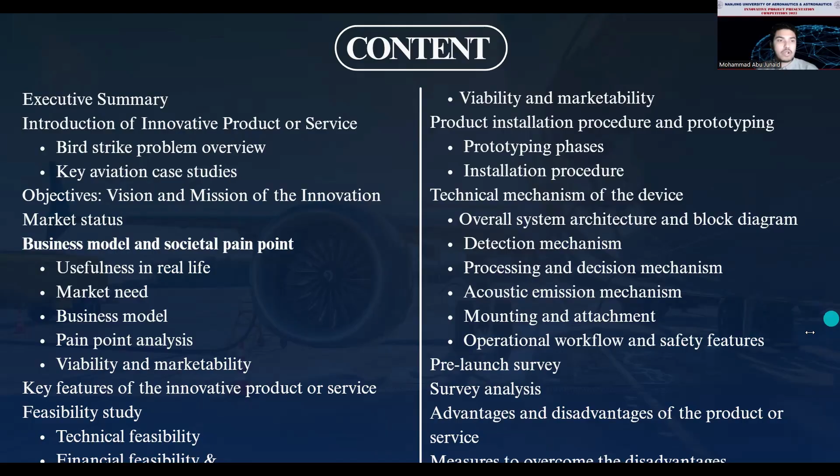Then we have the pre-launch survey analysis, and advantages and disadvantages of the product or service, and measures to overcome the disadvantages—we also discuss this. Moving on, we have the life cycle of the project, how we will design it, and the overall design and architecture—everything discussed in that part. And the project rationale, overall objectives, overall delivery of this project, how long it can take, and the methodologies we used to design this product and everything.

Everything is introduced over there. The project implementation: introduction, how we use the project to system components and interface overview, pre-flight procedures, in-flight operation, post-flight procedures, troubleshooting, and safety notes are all covered in this section.

Then we have the problem and risk assessment plan, how we can do all these things, and unfinished work, future improvements, and everything. After that, we have the acknowledgements, our learning outcomes, our meeting minutes, and every single thing we did in this course as case studies. So we also discuss this matter.

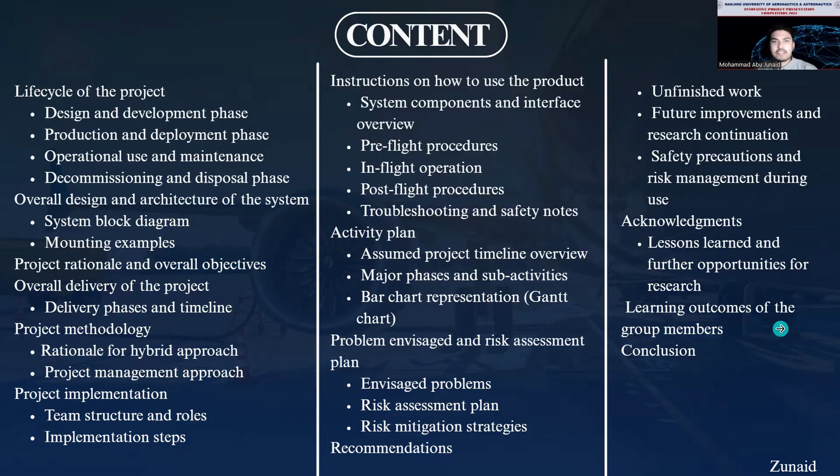So now let's begin with the executive summary. Good afternoon everyone, I'm Zunaid, and I will be walking you through the executive summary, a key case study, and the vision and mission behind our innovative solution to one of aviation's most persistent safety challenges: bird strikes.

The problem: bird strikes are not just a minor nuisance, they are a serious, costly, sometimes deadly threat to aviation safety. In the US alone, there were over 22,000 reported bird strikes in 2024 and 2025. Globally, these incidents cause more than 1.2 billion dollars in damages every year.

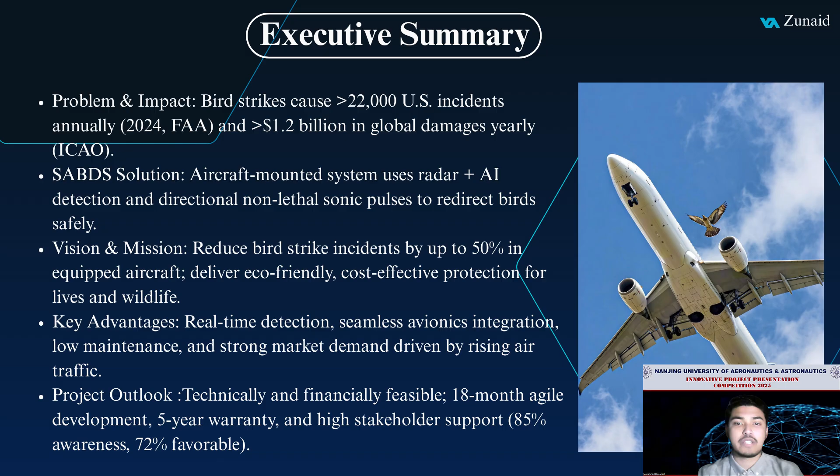But beyond the numbers, there are real human stories, and one of the most famous is the Miracle on the Hudson. Now we move to the case study: Miracle on Hudson.

In 2009, US Airways Flight 1549 struck a flock of Canada geese just after takeoff. Both engines failed. Captain Sullenberger and his crew had to make an emergency landing on the Hudson River. All 155 people on board survived, but the incident exposed a critical gap in aviation safety.

Engines were not designed to withstand large bird flocks. The event became a turning point in how we think about bird strike prevention.

Our solution, the SABDS (Sonic Aviation Bird Deterrence System), could have changed the outcome of that day. Using radar and AI, SABDS detects birds up to 500 meters ahead and emits non-lethal sonic pulses to redirect them away from the aircraft's path.

Moving on to the next slide: our vision and mission. So what we are trying to achieve - our vision: a world where bird strikes are virtually eliminated, safer skies for everyone. Our mission: to deploy a certified, humane, and affordable acoustic protection system for global aviation.

We have set clear strategic objectives to guide us: reduce bird strikes by 40 to 60% during takeoff and landing. Environment: 100% non-lethal, protecting both passengers and bird populations.

Economy: saves over 100,000 dollars per avoided major strike, with ROI within 2 years. Certification: achieve FAA and EASA approval, meeting all aviation safety standards. And market development: target high-risk regions first, aiming to equip 20% of the global commercial fleet within 5 years.

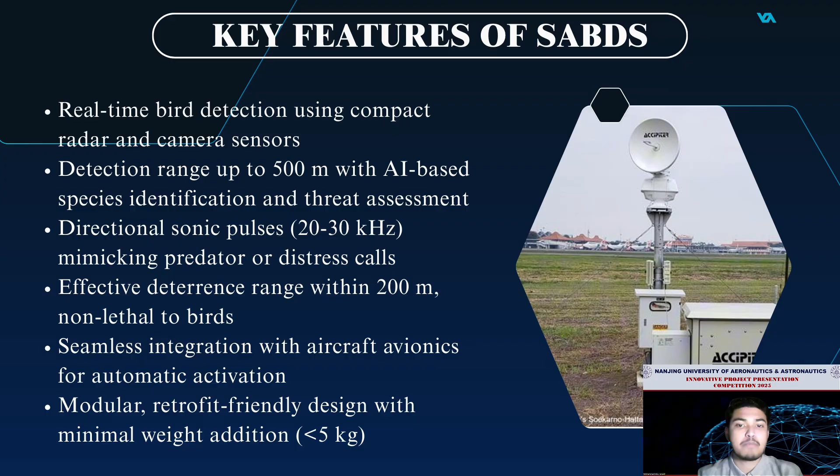I will now hand over to Kaium, who will dive into the market analysis and business models. Thank you. Hello everyone, my name is Abdul Kaium Talukdar, and I'm excited to walk you through an innovative solution designed to make aviation safer for all of us.

SABDS uses compact radar and cameras to detect birds in real time, up to 500 meters away. It can even tell what type of bird it is using AI. Once a threat is confirmed...

...it sends out directional sonic pulses, like predator calls, to safely scare birds away without harming them. And it's lightweight, easy to install, and works automatically with the plane's systems.

But there is more: our system is eco-friendly, uses very little power, and is made from recyclable materials. It logs all bird encounters for later review, and pilots can take manual control if needed. Plus, the sound library can be customized for different regions. Overall, it's designed to keep flights safe without adding extra work for the crew.

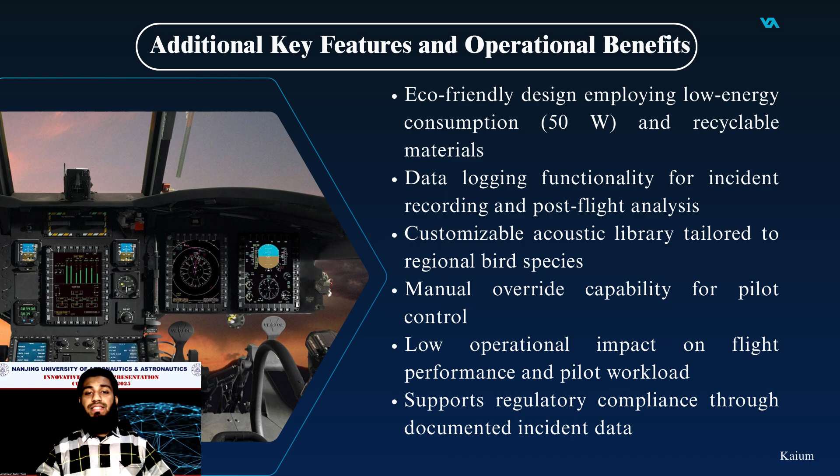So, is this idea realistic? We did a full feasibility study looking at technical, financial, and market angles. We based everything on real bird strike data and cost. The goal was to make sure SABDS is practical, low risk, and fits within aviation safety rules, meeting today's needs and tomorrow's challenges.

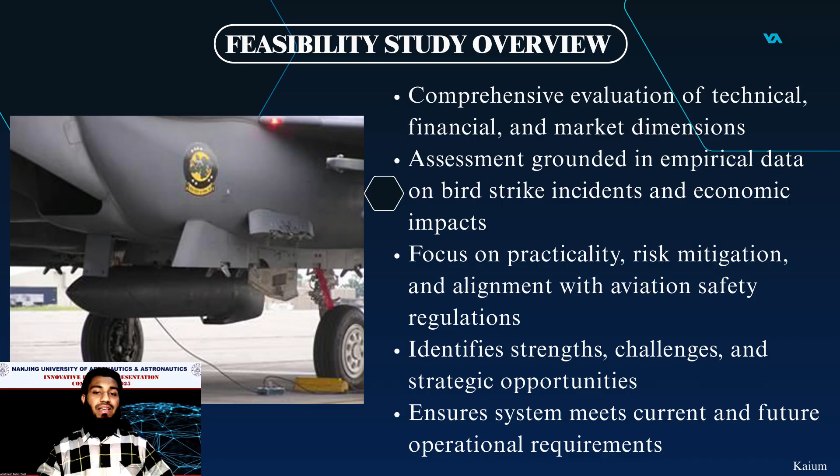Technically, we are on solid ground. We are combining proven tech, bird radar, directional sound, and AI. With over 95% accuracy in threat detection, the system meets FAA standards, runs on low power, and has backup systems in place. Similar acoustic systems are already used in wildlife control, so the concept is tested and ready.

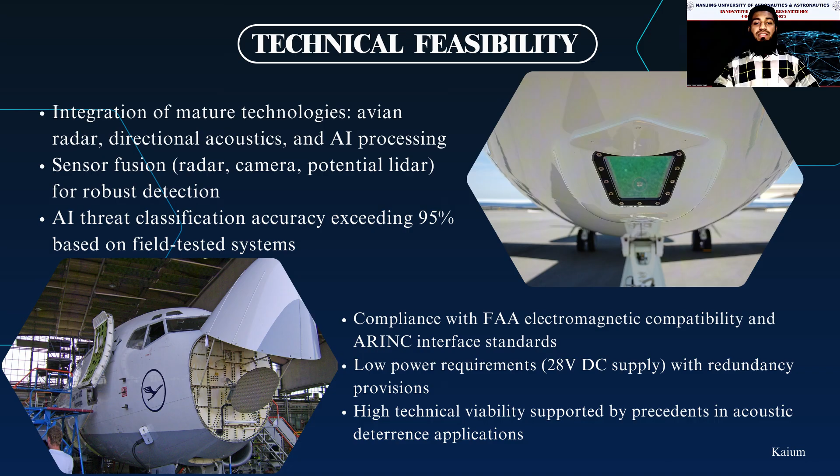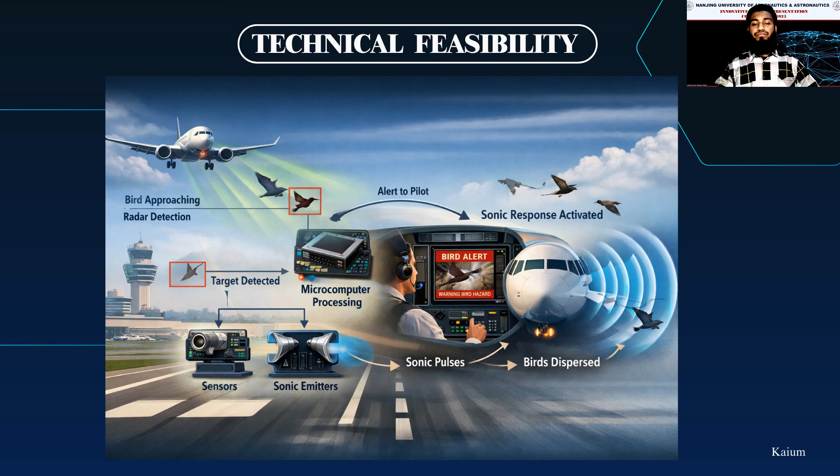Of course, there are challenges. We designed the system to withstand vibration and weather, use shielding to prevent electrical interference, and build smart software to adjust for bad weather. We are also using 3D printing and off-the-shelf parts to speed up prototyping; wind tunnel and sound chamber tests confirm it's durable and reliable.

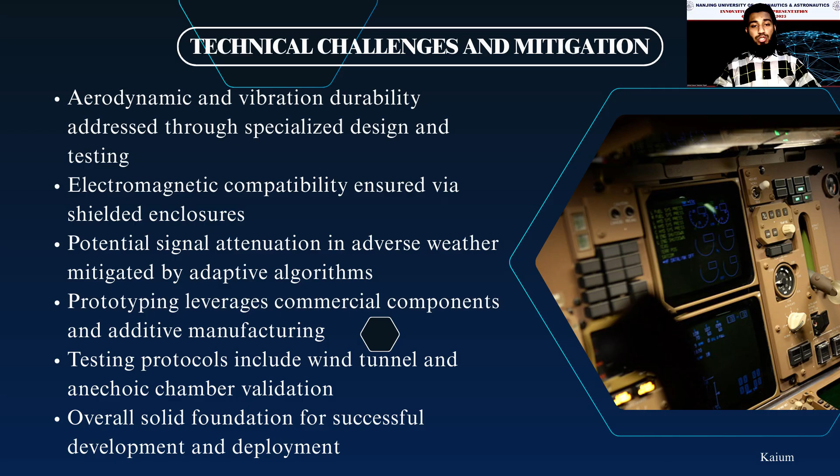Now let's talk cost. Development will cost about $2 million. Each unit costs $30,000 to make, and we will sell it for $50,000. Annual maintenance is low, around $500 per unit. We break even after selling 100 units per year, since a single bird strike can cost up to $1 million in repairs and delays. The savings add up fast.

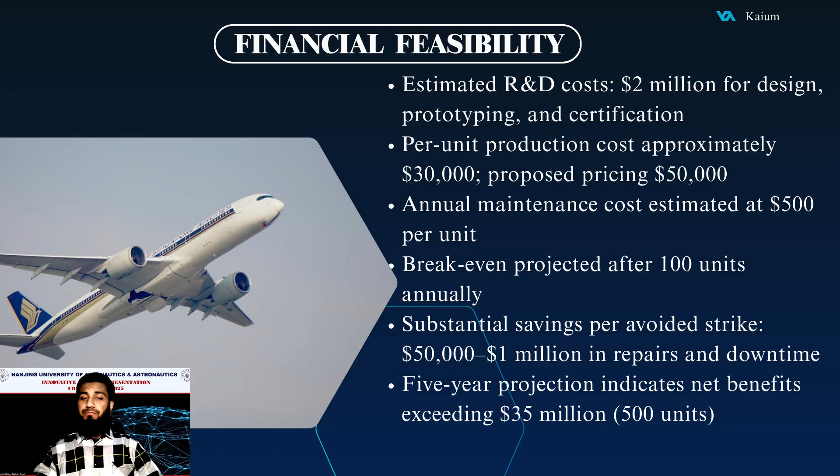Financially, this is a smart investment. Bird strikes cost the industry over $1.2 billion a year. We can also earn from AI updates and data analytics. Even if costs rise, the model stays strong. Airlines could even see lower insurance premiums. For anyone focused on long-term safety, this is a win.

The market is growing. Bird detection tech will reach nearly $240 million by 2035. Our system is unique: it works in the air, during low altitude flight, and is non-lethal. With stricter safety rules and rising operational costs, demand is strong, and because it's scalable and low maintenance, it's sustainable for the long run.

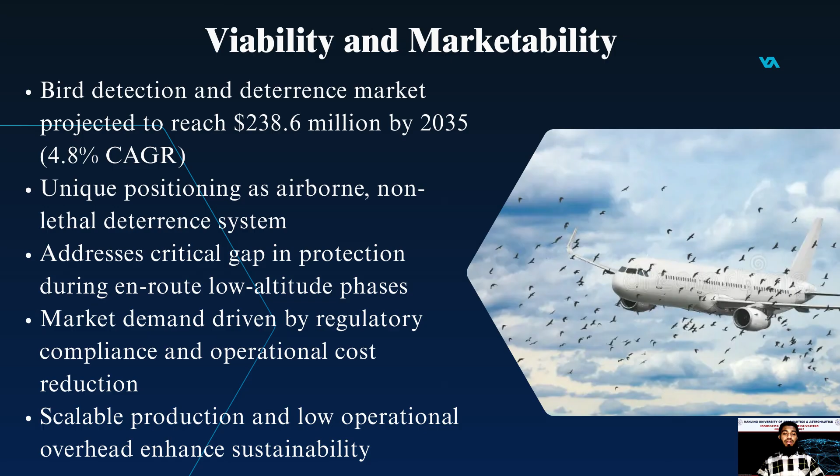Here is our SWOT breakdown. Strengths: it's eco-friendly, proactive, and integrates smoothly. Weaknesses: weather can affect performance and startup costs are high. Opportunities: more bird strikes mean more demand, plus new rules push adoption. Threats: competition from ground systems and skepticism about effectiveness.

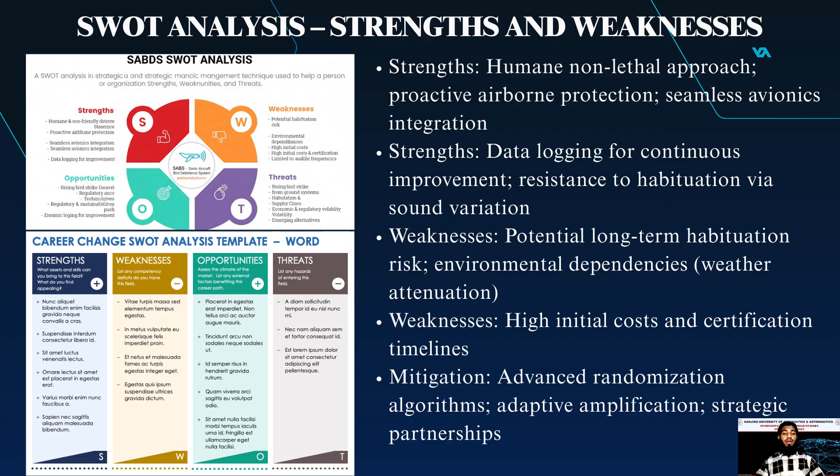Looking ahead, opportunities are clear: rising bird strikes, new regulations, and tech partnerships with AI and urban air mobility. Threats include existing competitors and doubts about performance. Our response: real world testing, adding hybrid features, and working closely with regulators to prove our value.

That brings us to the end of my presentation. Thank you for your attention.

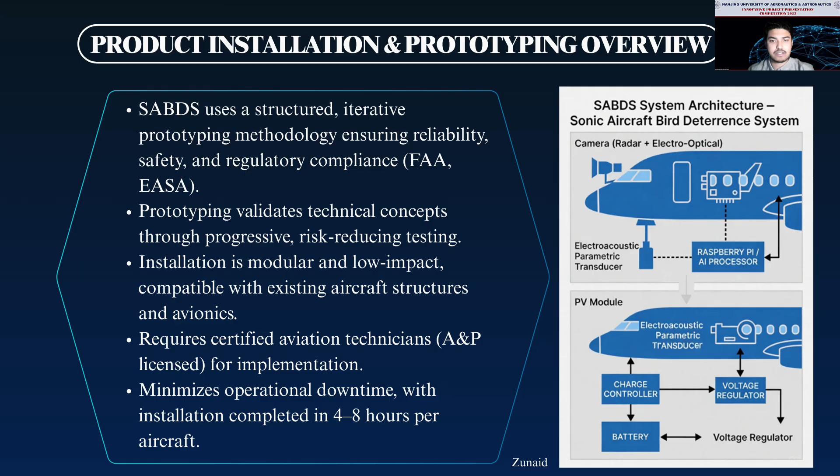Moving on to the prototyping phase. Prototyping proceeds through 5 clearly defined phases. Phase 1 involves conceptual CAD modeling and aerodynamic simulation, optimizing mounting layouts for aircraft compatibility. Phase 2 consists of component-level bench testing of radar, AI processor, and acoustic emitters to verify detection accuracy and power consumption.

And DO-160 EMI compliance. Phase 3 conducts full environmental qualification, including vibration, thermal cycling from -40 degrees Celsius to +70 degrees Celsius, humidity exposure, and wind tunnel performance evaluation. Phase 4 encompasses field validation through ground vehicle trials, drone-mounted tests, and supervised flight evaluations to confirm operational realism. Each phase feeds directly into iterative refinement, systematically improving reliability, safety margins, and certification readiness.

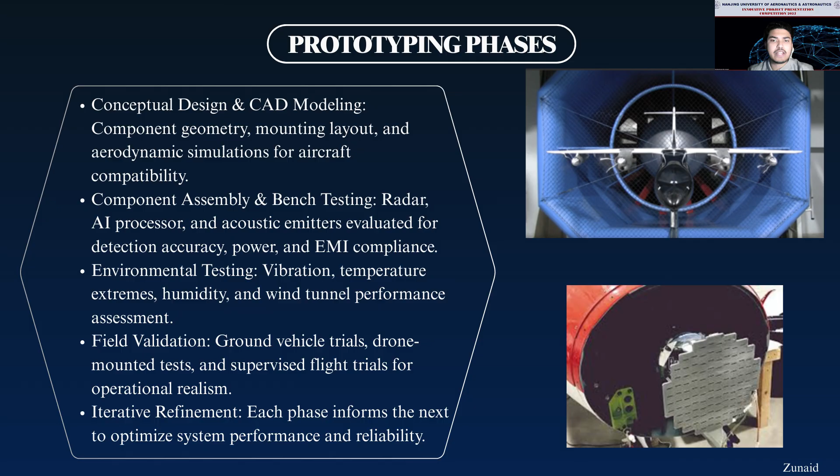Next slide, we have technical system architecture. The architecture operates as a closed-loop, real-time AI-enabled bird deterrence system optimized for low-altitude flight phases. Sensor fusion merges millimeter wave radar with electro-optical and infrared cameras to achieve greater than 95% detection accuracy.

The onboard AI processor analyzes bird trajectories, flock density, and collision probability using adaptive thresholds conditioned on flight phase and environmental conditions. Upon threat confirmation, directional parametric transducers are activated. Power management is handled via solar PV module charger controllers and voltage regulators, minimizing aircraft electrical load while preserving fail-safe operation.

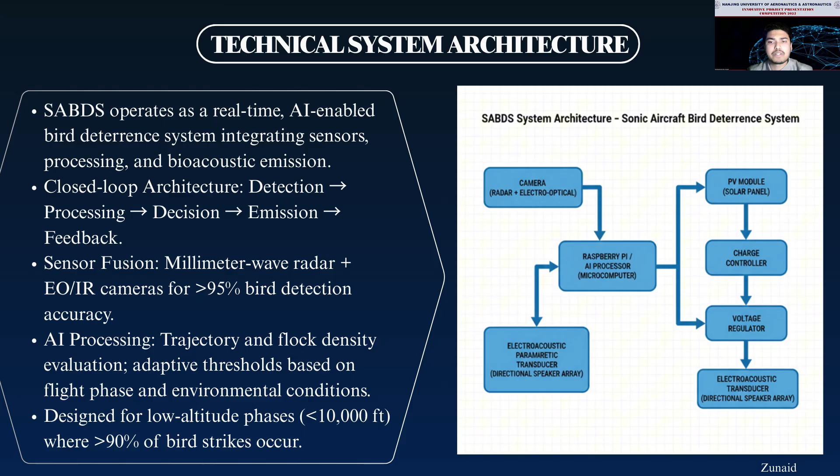Moving on to the detection and decision part. Detection and decision making are fully automated and tailored to high-risk phases. The system activates automatically below 10,000 feet, covering takeoff, climb, approach, and landing, where over 90% of bird strikes occur.

Multi-sensor forward scanning with radar and electro-optical thermal cameras continuously monitors airspace to 500 meters in all-weather conditions. Onboard AI fuses sensor data to classify threats by size, velocity, and flock behavior.

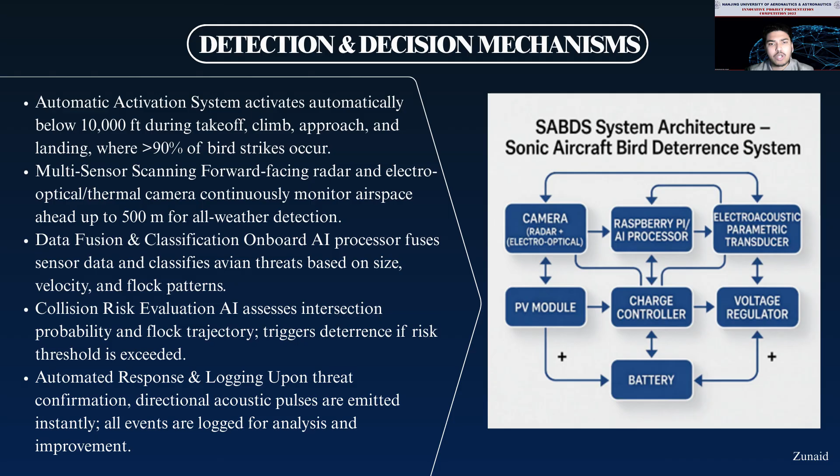Collision risk is assessed through trajectory, intersection probability, and projected paths. Acoustic deterrence is triggered only when the predefined risk threshold is exceeded. All detections, classifications, and responses are logged for post-flight analysis and continuous system improvement.

Moving on to acoustic emission and mounting. The acoustic subsystem relies on parametric principles to deliver precise humane deterrence. An ultrasonic carrier wave of 40 to 60 kHz is modulated with audible distress or predator calls at 2 to 10 kHz, producing a highly directional forward beam approximately 10 to 15 degrees wide through nonlinear air propagation.

Emissions reach peak intensities of 100 to 140 decibels in short, randomized 1 to 5 second pulses with an effective range of about 200 meters, minimizing habituation.

Transducer arrays are flush mounted on the wing leading edges inside aerodynamic IP67-rated fairings, weighing less than 3 kg per array, ensuring negligible drag, full weather resistance, and structural compatibility.

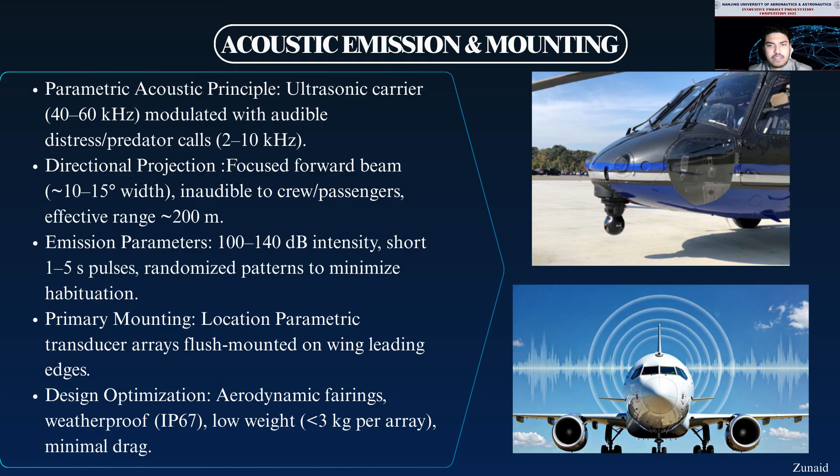Next, we have the operational workflow and safety. The operational workflow is designed to be fully automatic and non-intrusive. Activation and continuous scanning occur automatically below 10,000 feet. AI confirms threats and triggers directional emissions without requiring pilot intervention.

Safety is assured through tightly focused beams inaudible to crew and passengers, automatic fail-safe deactivation on fault detection, a manual cockpit override switch, complete DO-160 EMI shielding, passive alerts only, and full environmental compliance, including non-lethal operation.

IP67 weatherproofing and vibration and shock resistance, along with comprehensive event logging, supports ongoing performance refinement. Together, these elements establish SABDS as a technically mature, certifiable solution capable of meaningfully reducing bird strike risk during critical flight phases. This technical foundation supports projected performance gains and economic value.

We now proceed to the implementation timeline and risk assessment.

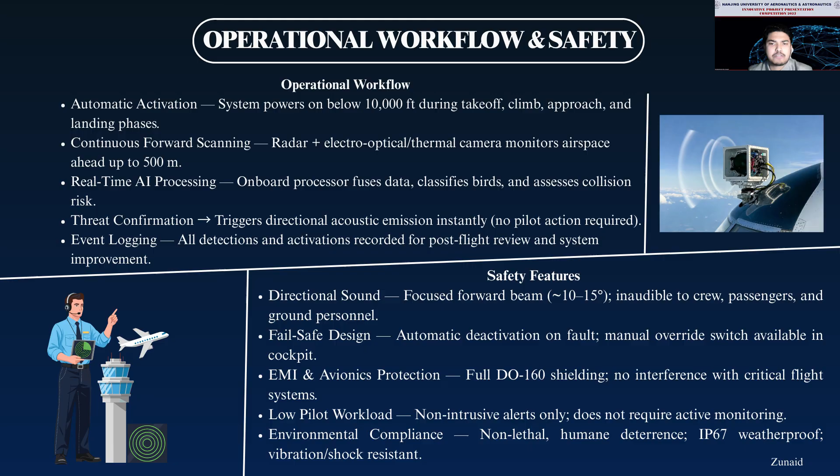Market status. Good afternoon, everyone. Let's begin with the current market status regarding bird strikes in aviation. Bird strike incidents are a significant and persistent safety challenge in the aviation sector.

Airlines face substantial costs due to aircraft damage and unscheduled maintenance, not to mention the operational and economic losses caused by flight delays. Current bird control measures show limited effectiveness and come with high operating costs, and with global air traffic on the rise, the risk of bird strike is intensifying. This creates a clear and urgent need for advanced automated bird deterrence solutions.

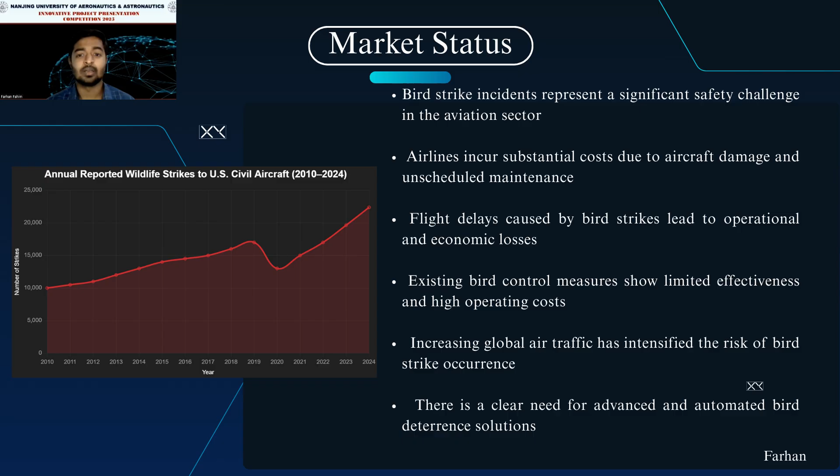As you can see from the FAA data reported, wildlife strikes to US civil aircraft remained a consistent concern from 2010 through 2024.

Now let's look at the business model and the societal pain point. Our primary stakeholders are airports, airlines, and aviation regulatory bodies. We plan to commercialize this system as an integrated product complemented by installation services. Revenue will be generated through direct sales, maintenance contracts, and future system upgrades.

From a societal perspective, bird strikes pose serious risks to passenger safety and aircraft reliability. These incidents lead to operational disruption and financial losses for both airlines and airports. By mitigating bird strikes, our solution contributes not only to improved aviation safety but also supports environmental balance.

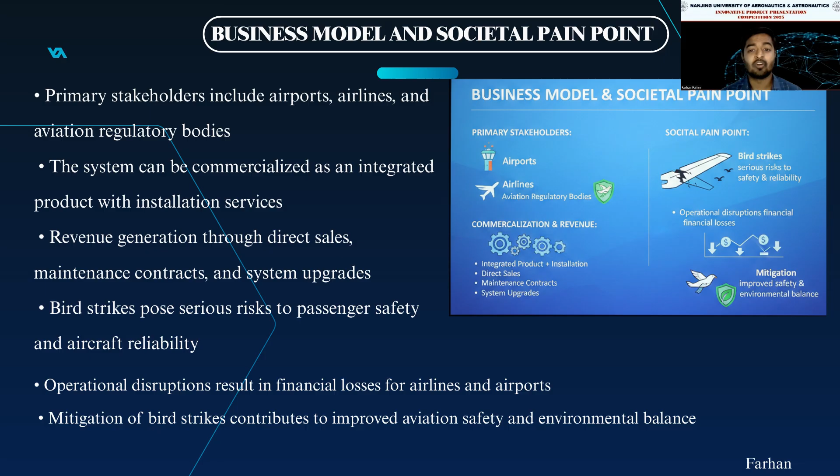Usefulness in real-world applications. Moving on to real-world application, our system delivers tangible benefits. It enables early detection of bird activity in runway and airfield zones, helping to prevent catastrophic engine ingestion and structural damage to aircraft. This directly enhances overall flight safety and boosts airport operational efficiency.

A key advantage is its ability to support continuous 24/7 monitoring with minimal human intervention. This solution is particularly applicable to airports located in high-risk ecological and geographic regions where bird activity is most challenging.

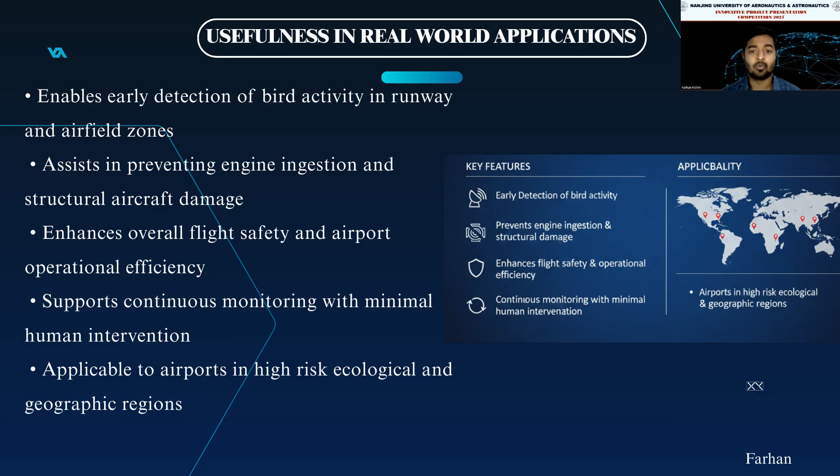Let's dive deeper into the pain point. Repeated bird strike incidents lead to high maintenance and repair costs. Flight delays and cancellations damage airline reputation and hurt passenger satisfaction.

Current methods, often manual or traditional, lack consistency and reliability. They also face performance limitations in low visibility or adverse weather conditions. What the industry clearly needs is a dependable, automated solution that operates with low overhead and delivers consistent performance regardless of conditions.

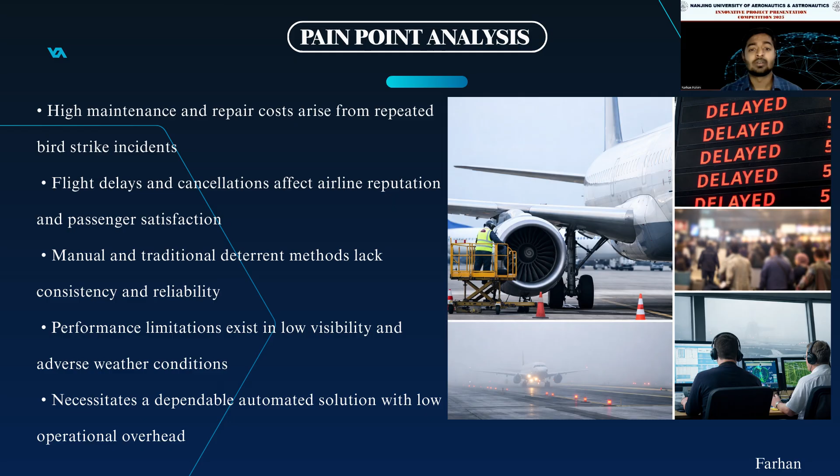The system feasibility is backed by established sensor and acoustic technologies. While there are initial implementation costs, the long-term benefits—reduced damage, fewer delays, lower maintenance—far outweigh these expenses. Our design is scalable, making it suitable for deployment across airports of all sizes.

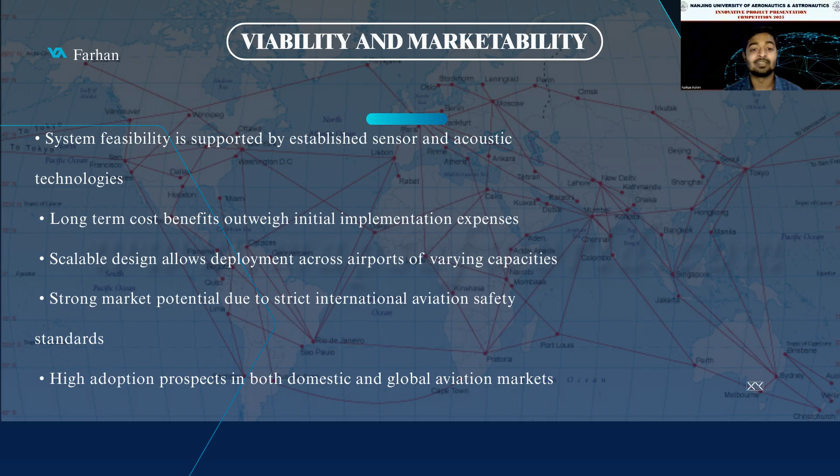There is strong market potential driven by strict international aviation safety standards. We anticipate high adoption prospects in both domestic and global aviation markets. This isn't just a product, this is a necessary evolution in aviation safety infrastructure.

Data quality control included removal of outdated or incomplete records, cross-referencing for consistency, and prioritization of high authority sources such as FAA, ICAO, and academic journals.

This disciplined synthesis yielded a consolidated, evidence-based, clean, high-quality dataset supporting robust analytical inference without primary sources.

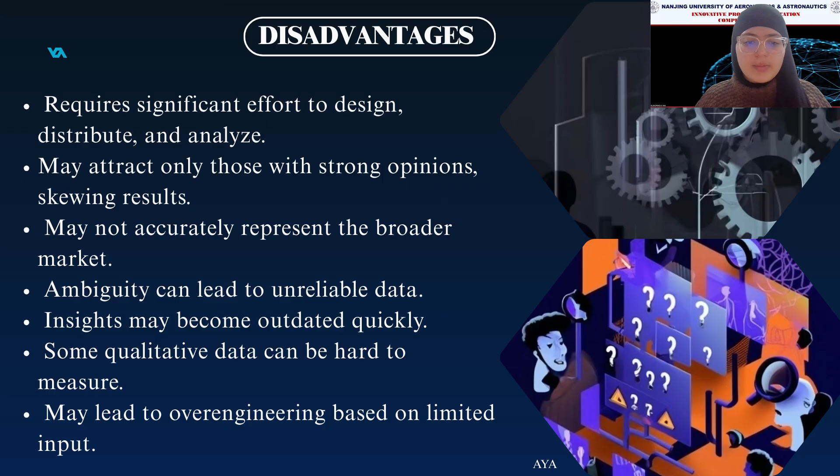To mitigate this limitation, deliberate countermeasures were applied throughout the process. Sources were rigorously selected for recency, authority, and methodological transparency, prioritizing FAA 2024-2025 reports and ICAO-aligned data.

Multiple and independent datasets were cross-validated to reduce single-source bias and improve representativeness.

Temporal relevance was maintained by emphasizing the most current statistics, for example 2024 strike increases.

A balanced analytical framework combined quantitative trend analysis, strike frequency, and damage cost with technical review of expert commentary, ensuring depth without over-interpretation. Finally, a specific linkage was maintained between findings and SABDS design decisions, preserving traceability and intellectual rigor.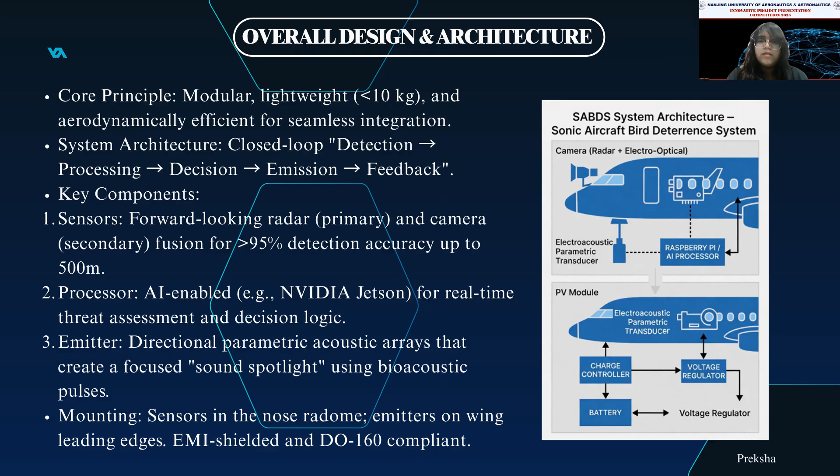To maintain aircraft integrity, sensors are mounted in the nose radome, while emitters are placed on wing leading edges, all while remaining EMI shielded and DO-160 compliant.

Finally, we have structured a 4-phase life cycle to ensure sustainability from concept to decommissioning. Phase 1 involves 6 to 12 months of intensive R&D training, targeting a 10 to 15-year operational life for the hardware. Phase 2 focuses on scalable manufacturing and a certified installation process that requires minimal downtime, only 4 to 8 hours per aircraft.

Phase 3 is our operational phase, utilizing over-the-air software updates to keep the AI threat library current against changing migration patterns. Phase 4 ensures component recycling in strict compliance with ROHS environmental regulations.

We stand behind this with a 5-year limited warranty and a performance guarantee of at least 70% deterrence efficacy.

But a sophisticated design is only as good as the plan used to bring it to life. To discuss our hybrid management methodology and our 18 to 24-month timeline, I will now pass the presentation to Nima. Thank you. Thank you, Preksha.

Our project success hinges not just on a brilliant idea, but on a disciplined and realistic plan to bring it to life. This brings us to project delivery. We have adopted a hybrid project management methodology.

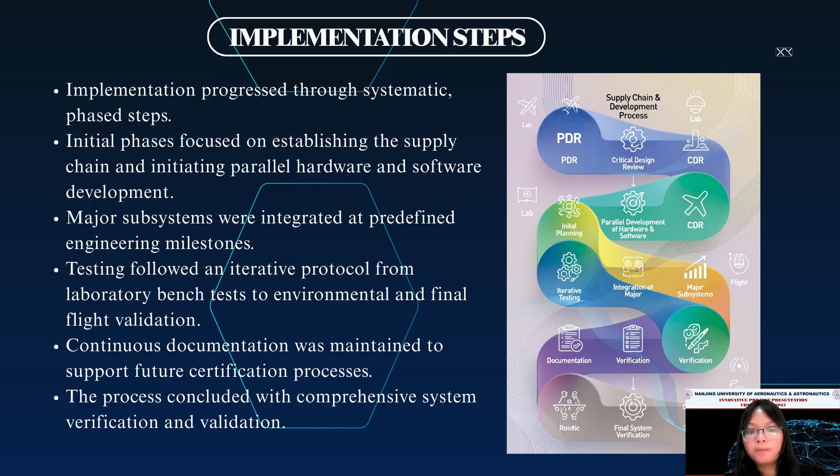The process concluded with comprehensive system verification and validation, proving that the system was built right and that it was the right system to solve the bird strike problem.

Any aviation system must be designed with the pilot in mind. The SABDS interface is engineered for seamless cockpit integration. System status, alerts, and manual controls are accessed directly through the aircraft's existing multifunction display.

The pre-flight procedure is minimal, requiring only a quick status verification via our built-in test. Crucially, the system activates automatically based on the aircraft's flight phase and altitude, aligning with pilots' expectations and standard operational flows.

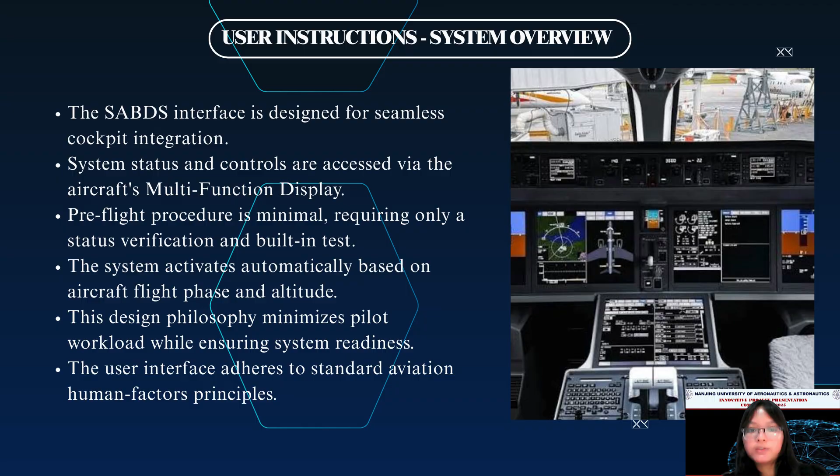This design philosophy minimizes pilot workload while ensuring system readiness, adhering strictly to standard aviation human factors principles for safety and usability. In operation, the system functions autonomously. During flight, it continuously scans, detects, and if necessary, activates deterrence without pilot input. The pilot is notified of activation via a standard non-intrusive cockpit alert.

Pilot response is typically limited to alert acknowledgement, with a manual override switch available if ever needed. Post-flight, all event logs are automatically available for review by maintenance and safety teams, supporting continuous improvements and incident analysis.

It is vital to state that SABDS is classified as an advisory safety enhancement. It does not replace established pilot procedures like visual scanning or communication with air traffic control. It is a layer of automated proactive protection added to the existing safety ecosystem.

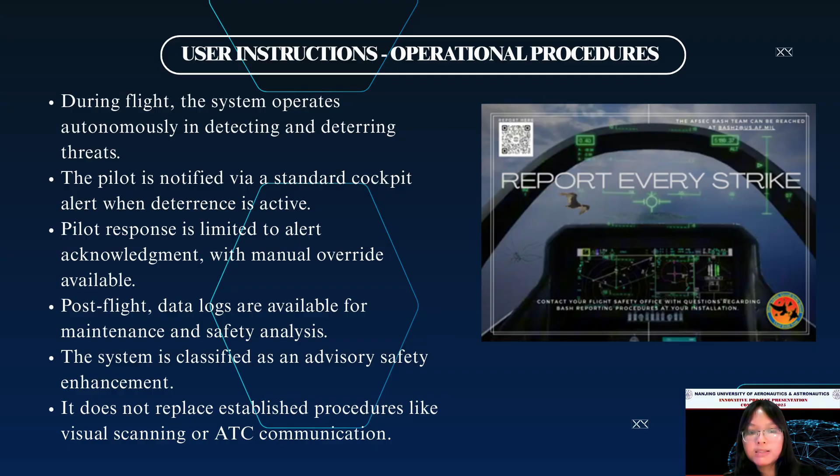To ground this in our academic content, we developed a detailed 18-month activity plan for our university-led proof of concept. This plan is realistically scoped, accounting for academic schedules and research constraints. It is divided into 5 sequential phases: planning, designing, prototyping, testing, and closure.

Each phase has clear deliveries and review gates to ensure disciplined progress. Please note that this timeline brings us to a functional prototype. It does not include the additional extensive duration required for full regulatory certification, which would be the focus of the subsequent

Alongside scheduling, we'll proactively identify key envisaged problems. Technical risks include electromagnetic interference and ensuring consistent system efficacy across diverse environments. Regulatory and market adoption risks also present significant challenges.

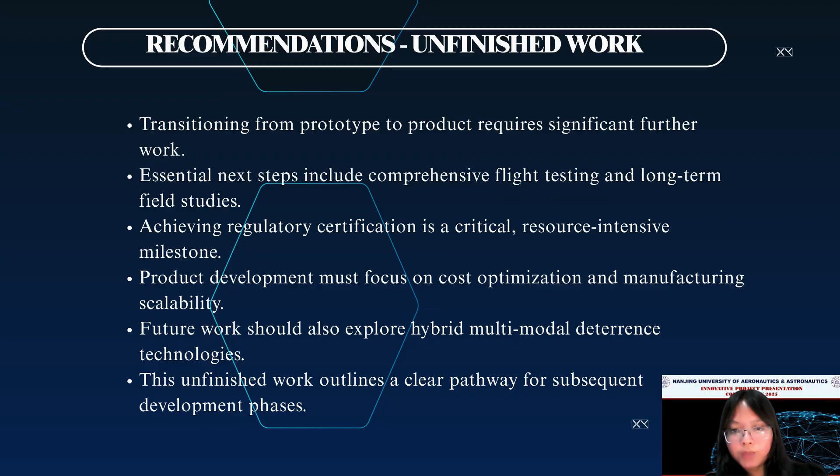This outlines a clear and necessary pathway for subsequent deployment. Beyond the immediate product, this establishes a platform for substantial future research. Key opportunities lie in predictive AI using migratory pattern data, adaptation for urban air mobility vehicles like air taxis, and building global bioacoustic libraries for species-specific deterrence.

Regarding safety, safe operation is not negotiable. It requires adherence to defined pre-flight and in-flight procedures. Pilot and maintenance crew must be adequately trained on system operation and limitations.

Any system fault must be managed by a clear protocol: deactivation and reversion to standard procedure. Safety is paramount and has been integrated into every aspect of the system design and operational protocol.

This journey has been much about the process as the product. I'll share the key lessons I'm taking forward as a team leader. First, interdisciplinary innovation demands intentional communication. We had to build bridges between engineers, programmers, and domain experts, creating a shared language. Second, regulatory requirements must be foundational, not an afterthought. We learned to design for certification from day one.